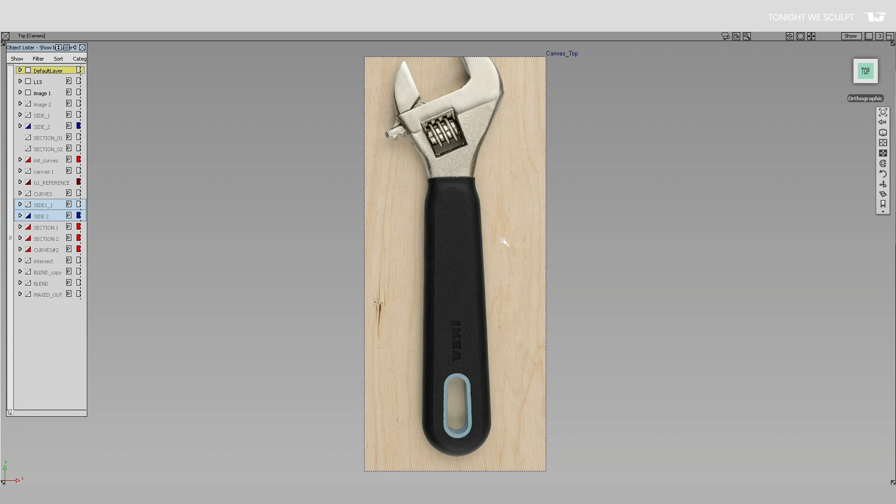Tonight's topic revolves around an IKEA tool, the Trixig wrench execution. Let's take a look at some images while I'm trying to distill the story down into one question.

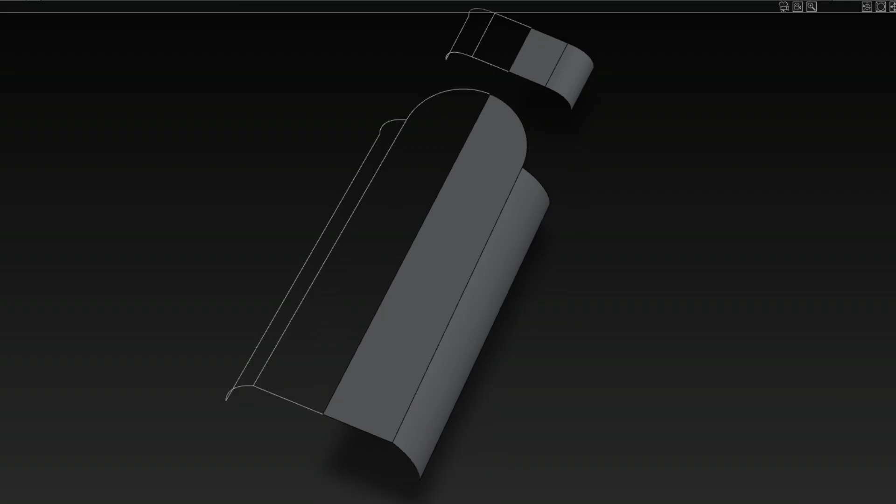An industrial designer has borrowed the same execution for their design, which, unlike the IKEA handle, is symmetrical to both X and Y planes, meaning we're going to build a quarter of the geometry. It's worth mentioning that the designer builds the model themselves and gets stuck with the blend between side 1 and side 2.

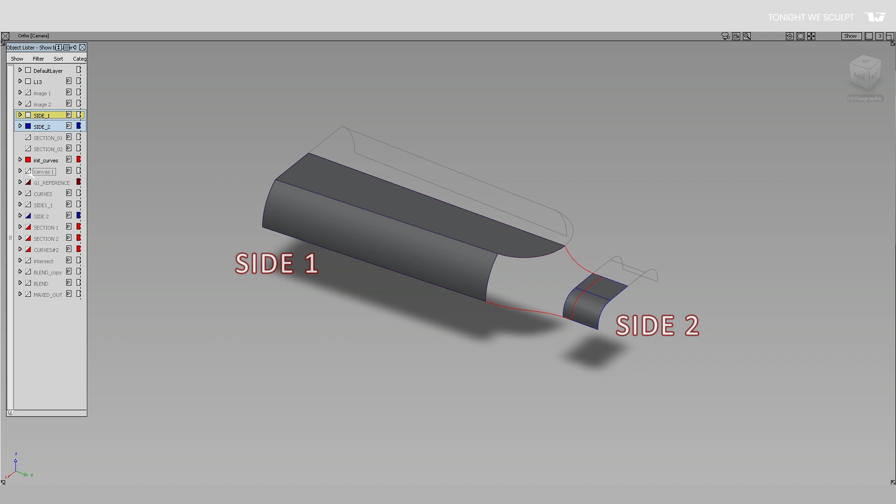So the question is, how to close this? I'm going to show a possible solution. My first suggestion: stop interpreting existing surface boundaries as some frame that has to be auto-filled by the software.

Rather, envision what highlights the neighboring surfaces will display, and what transitions would look best and be most important. More specifically, count the number of sides you'll have to cover. Having this guesstimate curve loop is a good start, not necessary though. In this case, we have 6 sides.

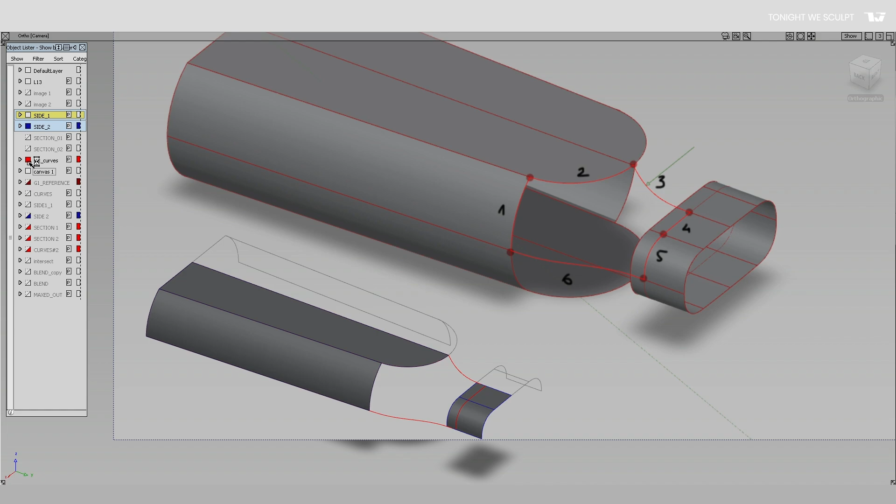Keep in mind you have to work with 4-sided patches. Please, 4-sided patches only, right? Step 1: let's close side 1. Build the missing surface in a way that drives the highlights parallel to the inner theoretical patch here.

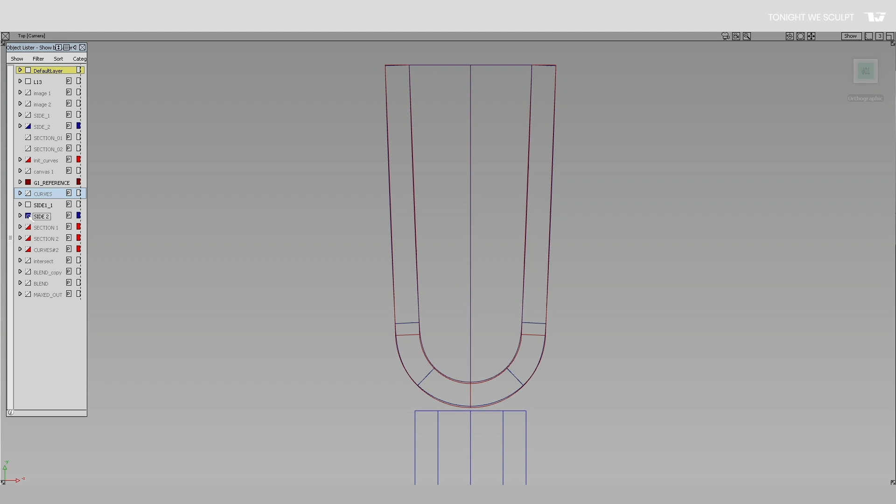I stopped here and redefined the shape, added some lead-in, and tweaked the curvature. Feel free to make a better looking version — it's a good exercise for aspiring designers anyway.

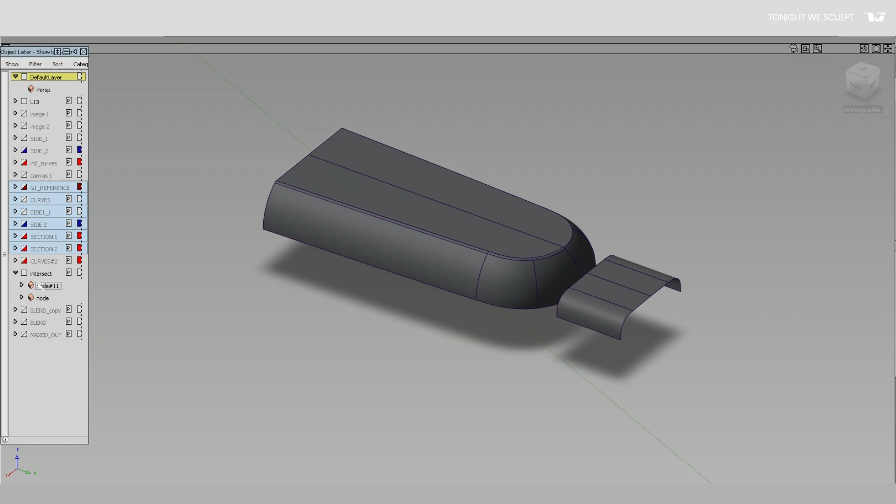Step 2: I can move side 2 freely in Y, since it's a prism.

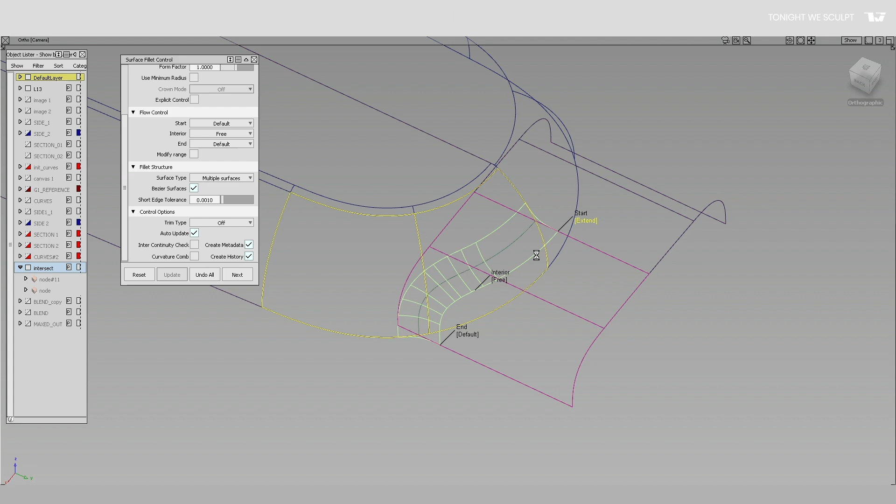You see how we're one fillet away from the final geometry now, right? Well, unfortunately, a wide enough fillet won't roll over this pre-existing one on the corner. It has to be built manually.

It won't be a problem if you build the ball corners before. This is what I came up with.

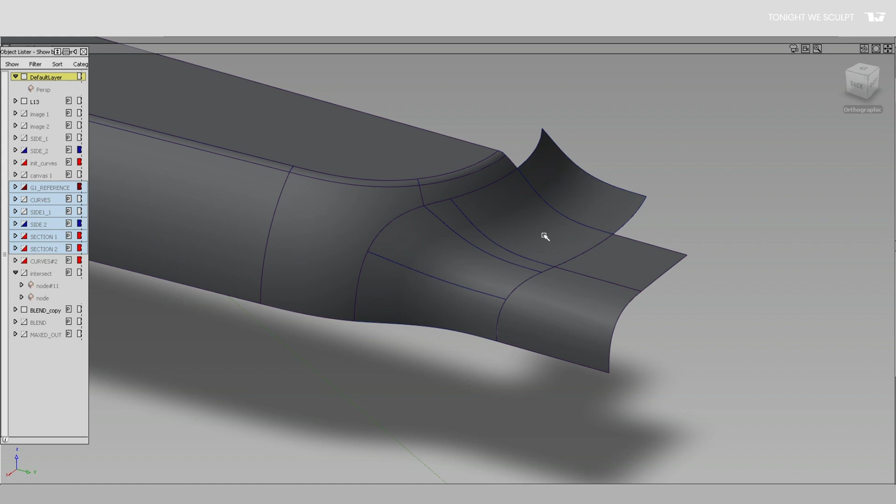The patch I'm hovering over is directly from the auto fillet. I'm not ashamed of the CV flow either.

I proceed with displaying connections, and then we can evaluate the highlights.

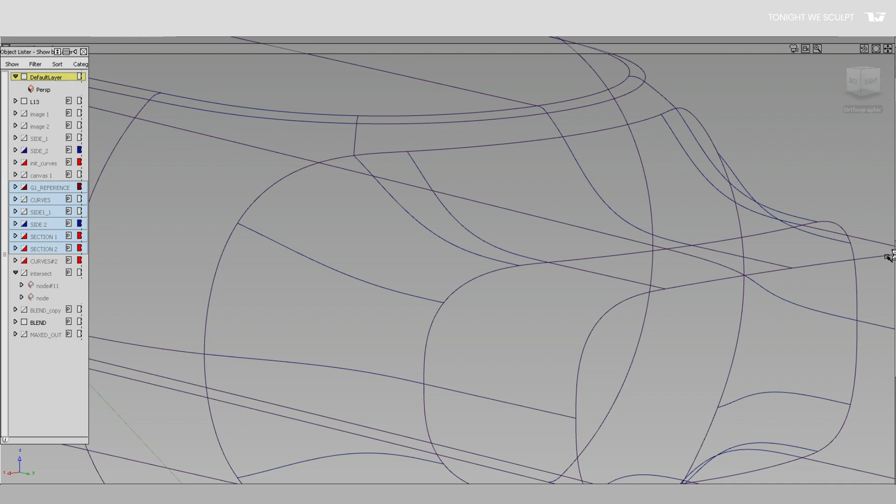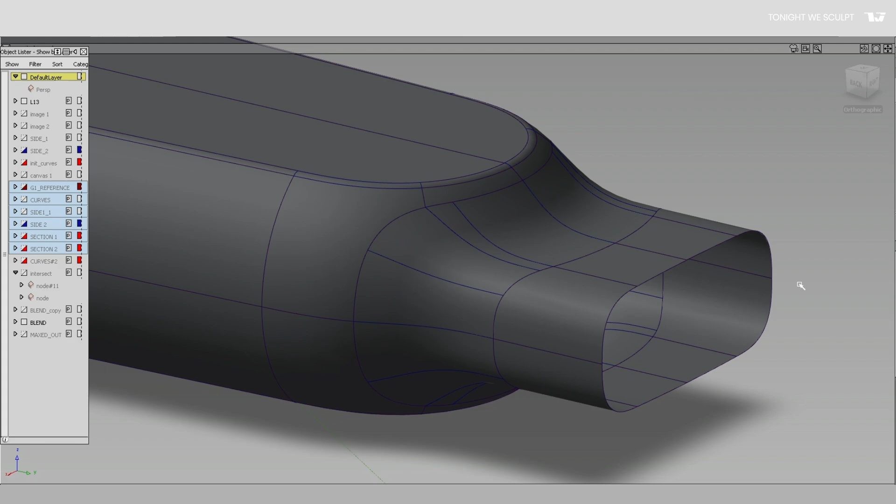Do I recommend sketching patch layouts beforehand in 2D? I think you make the most of your time if you explore these kind of transitions in 3D directly. Use 2D to get the proportions and main highlights right.

And this would be the ideal layout, which I decided not to pursue since I already achieved curvature continuity.

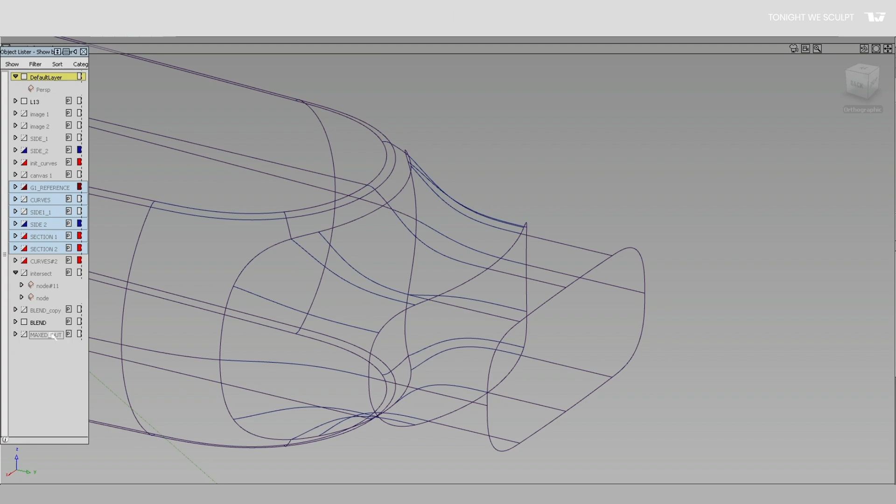I already put this in V-Ray, so I'll leave you with the final render. Until next time.